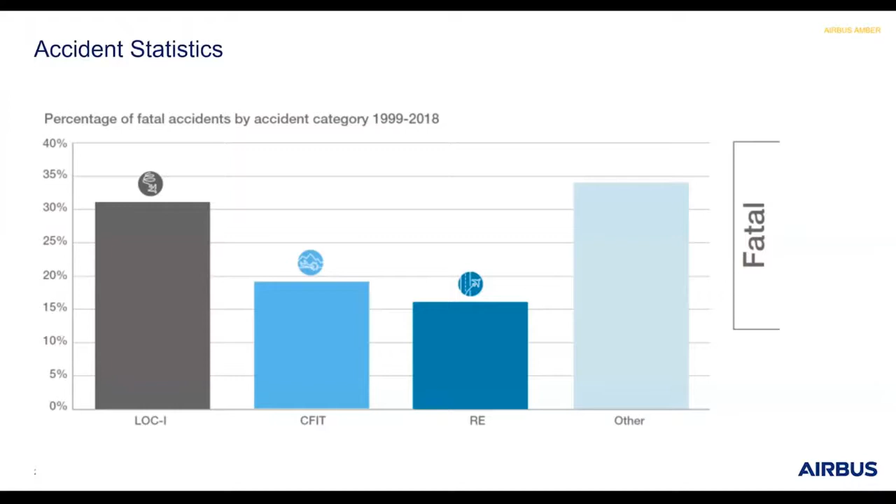Now, runway excursions are certainly not the largest proportion of accidents that create fatalities, but they are consistently about one third of the accidents that cause hull losses. So they generate a lot of financial damage, but whenever you have a runway excursion, it is also down to pretty much luck whether or not you will have fatalities and injuries.

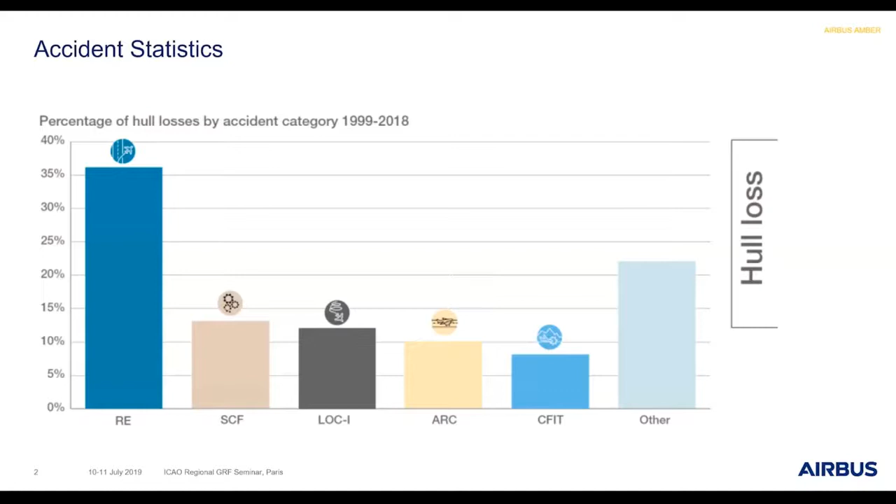So it is obviously a big industry drive to reduce this type of accident. And we have not been, over the last 10 years, extremely successful in doing so. The runway excursions are the one type of accident that tend to resist our efforts so far, even if we do see in recent times a decline.

It is at this point too early to say whether this is already due to the initiatives that have been launched by industry in order to address the causal factors. And when you look at those causal factors, they tend to include always some type of degraded runway condition. And this is what the global reporting format is trying to address.

It's trying to improve the way that we look at the runway in order to report it to pilots, and for the pilots to be able to assess the effect on performance more accurately.

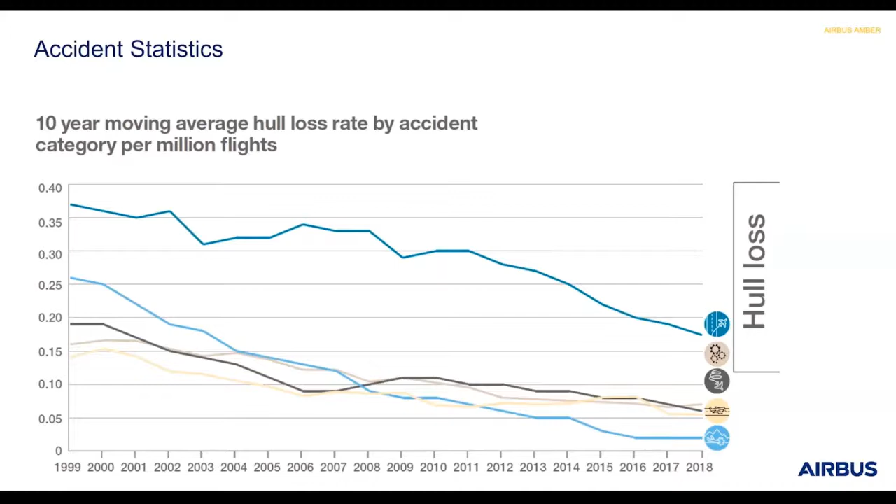So talking about the effect of the runway condition on aircraft performance, we have different factors on the runway that affect the way that the aircraft will, mostly in our context here, be able to brake. So we have inbuilt criteria like the macro texture, the microtexture.

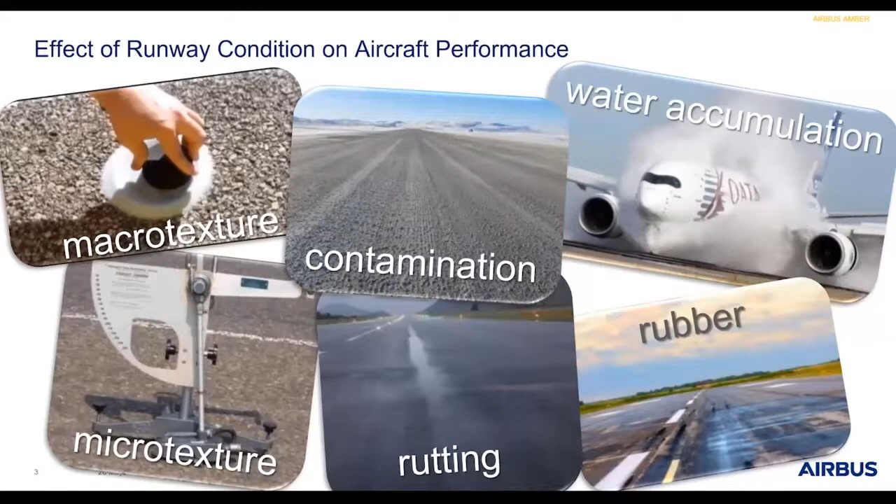We can have some sort of contamination that falls onto this runway due to the weather, like winter contamination, ice and snow, but also water, which is a huge concern when we're looking at runway excursions. We also have to consider the degradation of the runway over time, be it due to the alteration of its surface or due to the accumulation of rubber or other polishing effects.

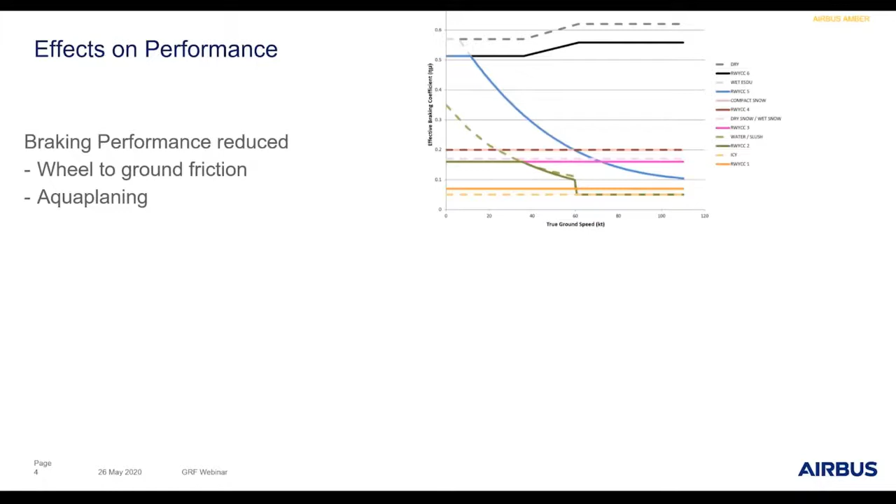So none of this is exactly new, and in performance, we have tried to model these effects by looking at two major contributors to the braking action that an aircraft can achieve on a given surface, which is the friction, and that includes aquaplaning effects where the tire is separated from the runway surface.

And the contaminants, the drag effects that the contaminants, and that includes a layer of water, may cause on the aircraft, which is mostly critical when we want to accelerate on the surface. So this also has an impact on takeoff.

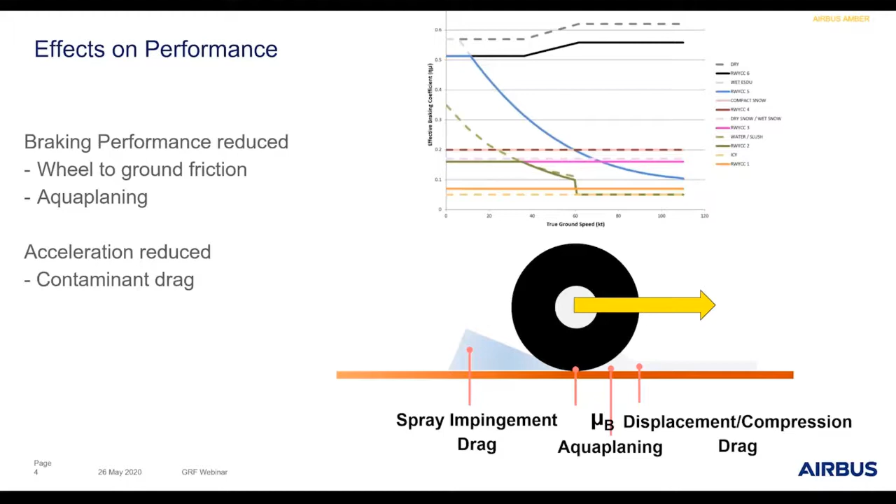So in order to achieve performance relevant reporting, which was the task of the ICAO Friction Task Force, we have to provide information to the flight crew that is important to their assessment and to their understanding of the runway state. And the operational need is to know what is on the runway.

Is it covering a portion that will have a significant effect on the performance capabilities of the aircraft? How deep is it when it's a fluid contaminant? This will have an effect on the aquaplaning and on the drag effects.

And something that the industry has perhaps not been looking at enough in terms of reporting is, are the built-in qualities of the surface still okay, or are they starting to become deficient in such a way that it will affect the capability of the aircraft versus the expectations that we put into our models?

So to fulfill this operational need, a new assessment and reporting method, the GRF, was put together, and it includes only the essential information for the awareness of the situation and for the capability of assessing the performance of the aircraft. This information is updated according to the relevant criteria, which will induce changes on this performance.

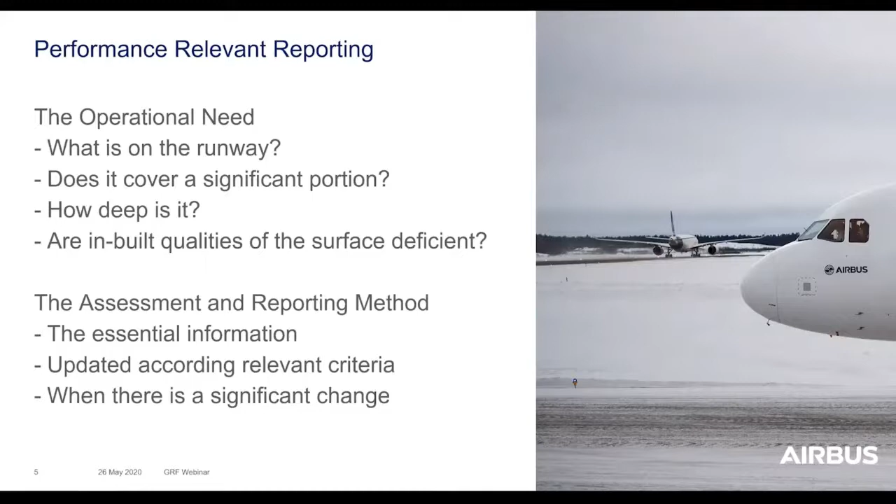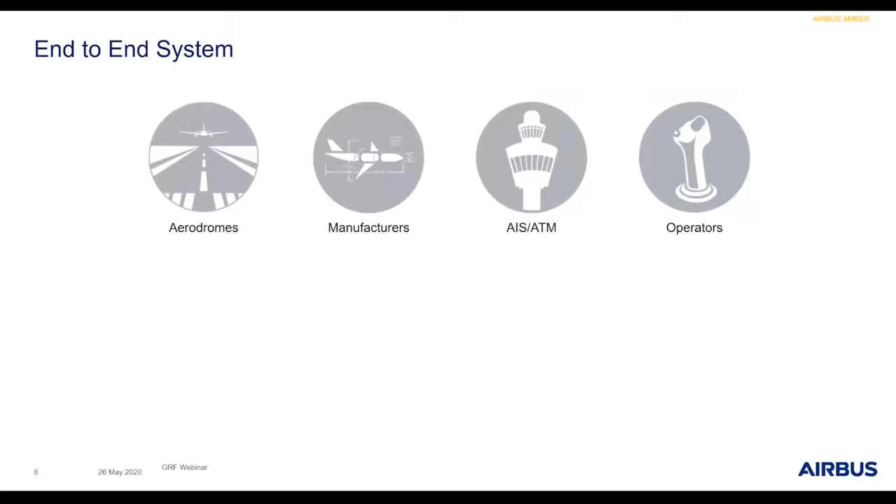And as you understand from this, this is an end-to-end system which involves all of the stakeholders of aviation. Obviously, the aerodromes who need to look at their runway and report the conditions, the manufacturers who need to provide performance. The information is relayed by the ATM, and the operators who need to use it appropriately.

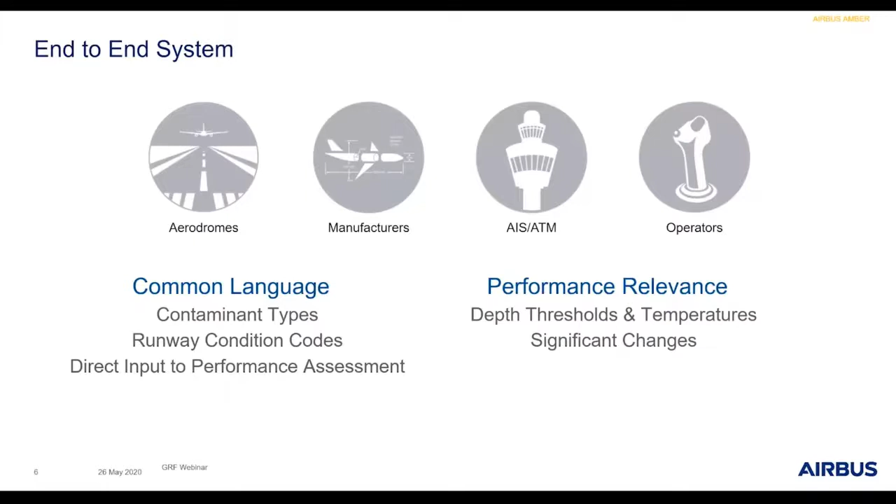And this end-to-end system has been achieved by defining a common language regarding the contaminant types that can be reported and used throughout the system, by defining a new concept, which is the runway condition code, which we will see a little bit later in this presentation, but which is a direct input into the performance assessment that can be made by the flight crew. And as I said, performance relevance was throughout this effort always the main consideration for putting information in and for identifying what is significant in terms of criteria and in terms of changes.

Now, it is an industry consensus that was put together by all of the stakeholders that have contributed and continue to contribute to the implementations that are being run by the various states and regions.

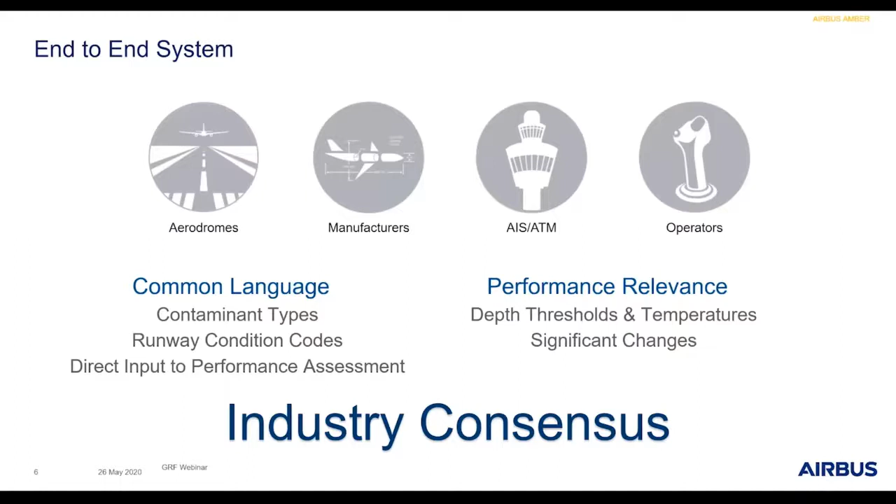And to support this effort, ICAO has produced a large number of documentation, which includes annexes and PANS and documents which are guidance. So we see that obviously the main document for aerodromes will be the Annex 14, supported by the PANS-Aerodromes, which will provide the procedures, already it does, and the Circular 355, which gives background information and guidance to aerodromes.

On the aircraft manufacturer's side, we have a small change to the Annex 8, and we will soon see the aeroplane performance manual, which will be published in its unedited form soon.

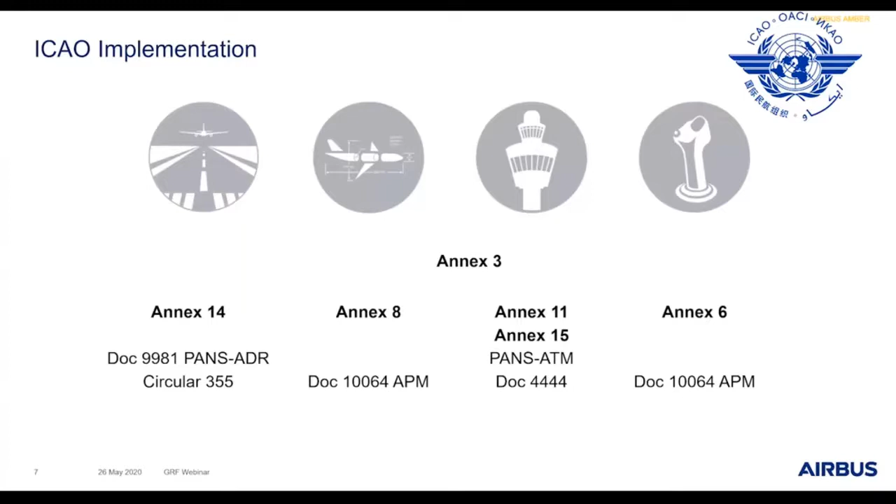Then we have on the ATM side, Annex 11 and 15, which are supported by the PANS-ATM and the Doc 4444 for the phraseology and the format of the new SNOTAM format. And on the operator side, Annex 6, which is also supported by the same aeroplane performance manual.

The tasks that fall onto the different stakeholders are the way that aerodromes are going to assess and report surface conditions, the way that aircraft manufacturers are going to provide performance information, and the way that the information is relayed by SNOTAMs and via ATIS to the flight crew.

And it includes for the flight crew a new requirement to perform performance assessment at time of landing, and also to report into the system whenever worse than previously reported runway conditions are observed by the crew, so to provide a special air report.

The keystone of this whole effort is the runway condition assessment matrix. And we're going to go into the various elements of this immediately. It is the method by which we can assess how much the aircraft is affected by whatever is on the runway.

And what you see here is the complete version, which has been built predominantly for winter conditions. But this system is equally applicable around the world in all those countries that are affected by rain, and I don't think that anybody is exempt from that.

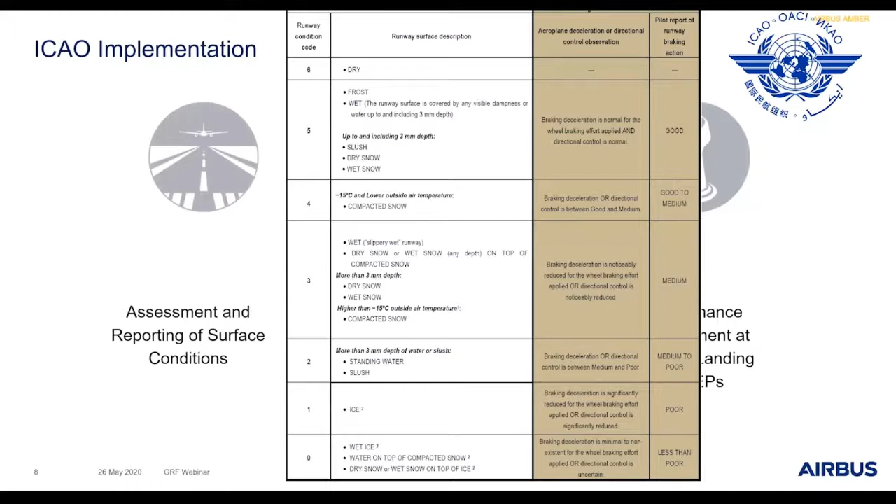So we also have a simplified version of this matrix, which addresses the changes of runway conditions due to the presence of water. And it allows a simplified assessment by the concerned aerodromes that do not see winter conditions in their region.

It is no less important, though, to report these variations in wet conditions, because you can see already from this matrix that a little bit more water on the runway can lead to a stark degradation of the conditions for the aircraft.

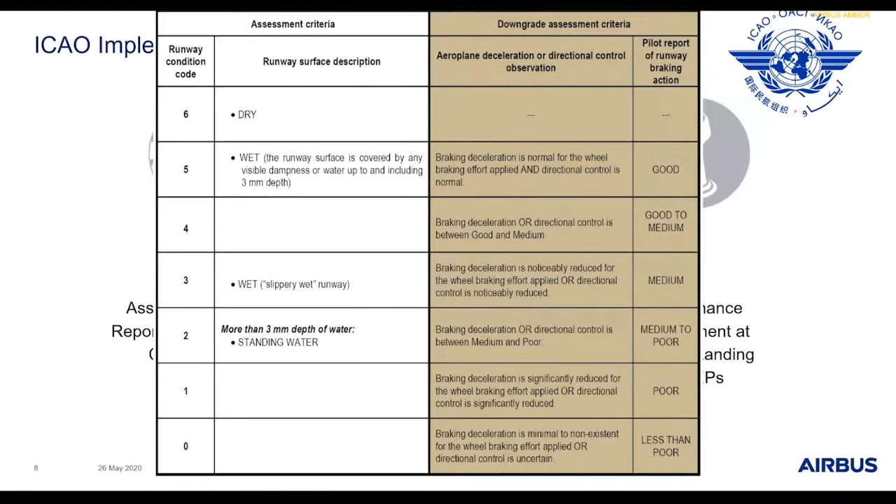Let's have a look at the elements of this matrix. I was talking already about the runway condition code. The runway condition code is the single most important information for the flight crew when assessing landing performance.

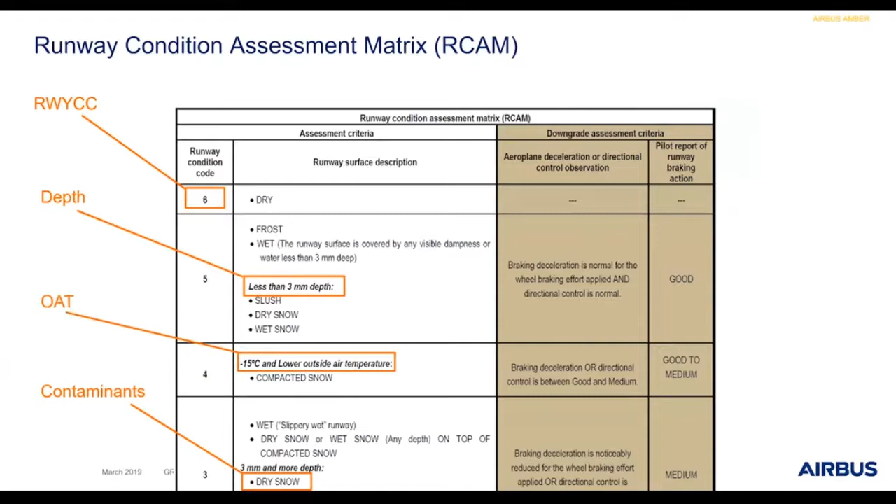It is the result of an overall assessment of the runway, looking at all the other criteria, like the contaminant type, the depth of the contaminant, the outside air temperature for some of the contaminants, other observations such as vehicle braking used by the ground crew, AIREPs provided by preceding flight crew, and coverage, which is not directly in the runway condition assessment matrix, but which is part of the assessment process.

You may have noticed that this matrix no longer includes measured friction as a criterion for reporting to aircraft, because all of these things that you see on the screen are relevant to aircraft performance. Measured friction is not directly relevant to it. It does not represent a metric that will be useful in assessing how the aircraft will perceive the runway condition.

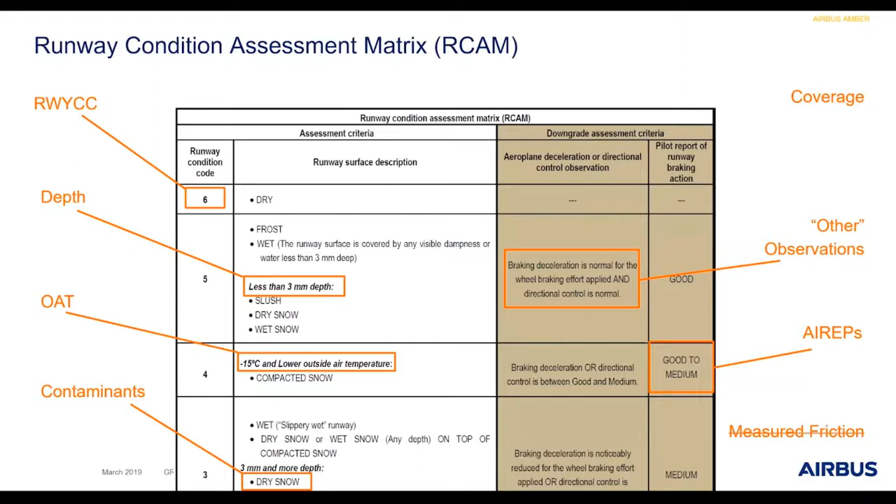So the predominant thing to know about the RCAM is that all the reporting criteria and all the significant changes that come in the procedures associated with this RCAM have been set for relevance to aircraft performance.

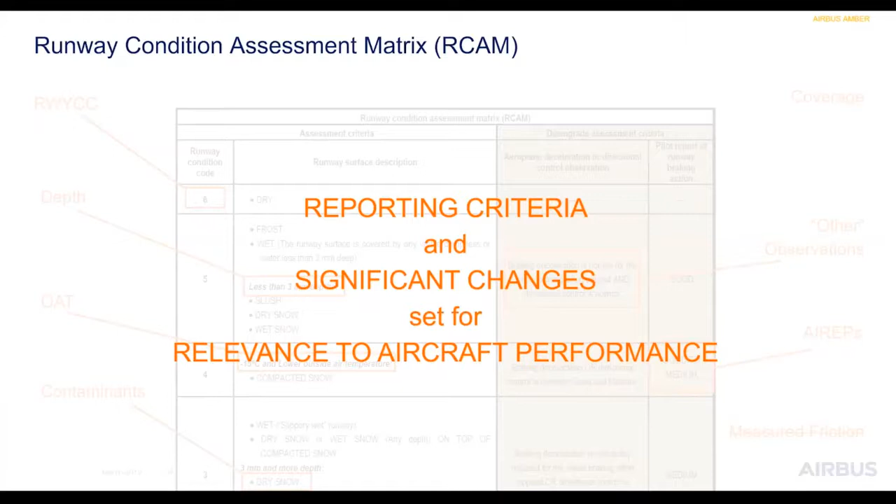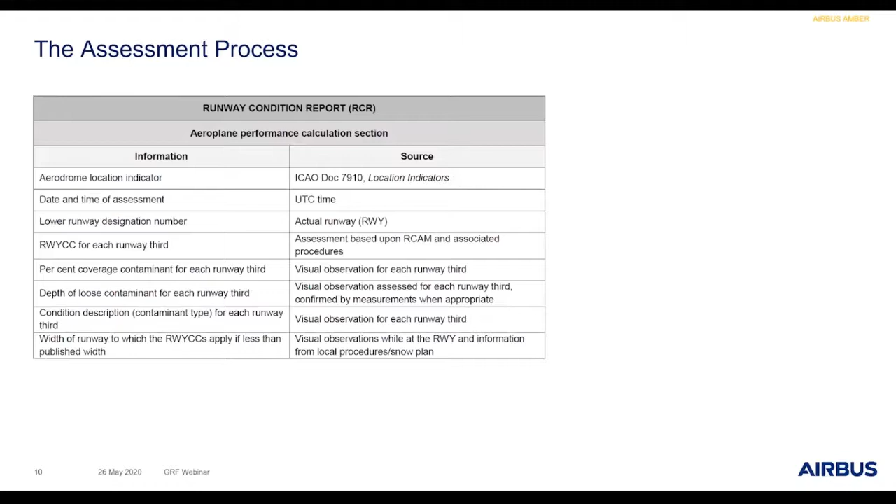The assessment process itself consists in putting together the information that is contained in the RCR, or the Runway Condition Report. Again, only information that is directly relevant has been included, and you see a list of it here. You also see how this information should be sourced, and you will find again and again in this table the visual observation. It is the central tool to the assessment of runway conditions for the GRF.

So measurements may be useful, but are not required. This is a system that is accessible to anybody, whether they're equipped with sophisticated measurement equipment or not.

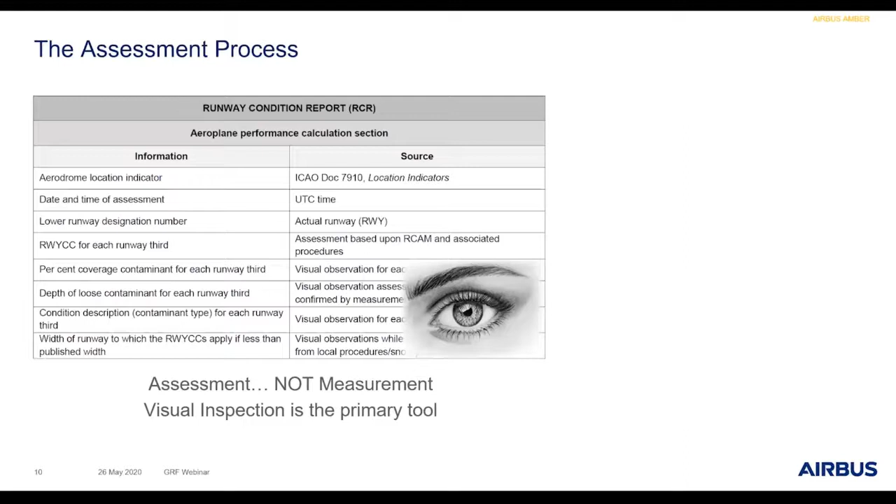To help the aerodrome operators, we have provided in the procedural material some flowcharts that also give you a process on how to assess your runway condition on a day-to-day basis. You can find this in the PANS aerodromes, and you can find additional methods and information in the Circular 355.

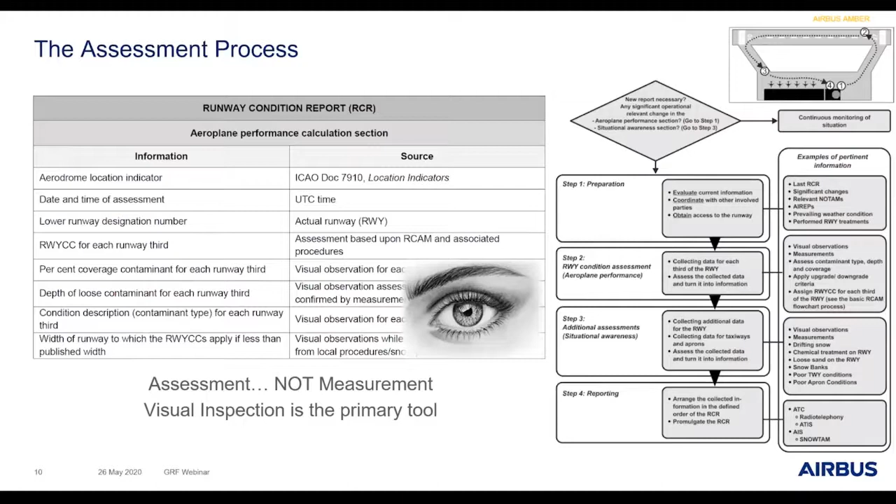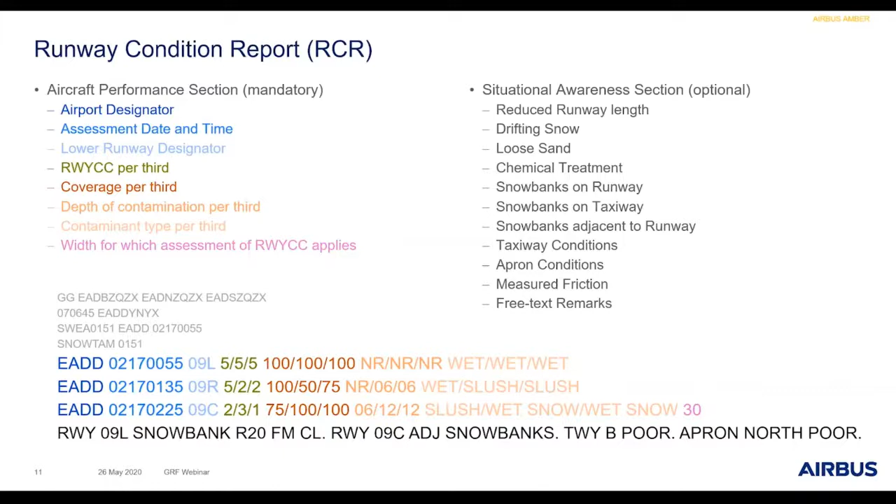One important constituent of the overall GRF system is a new set of landing distances provided by manufacturers. And these landing distances are more accurate than what we have been doing before. To start with, landing distances never used to include the outside temperature and the slope of the runway as a criterion for their determination, which is frankly surprising considering the magnitude of the impact they can have.

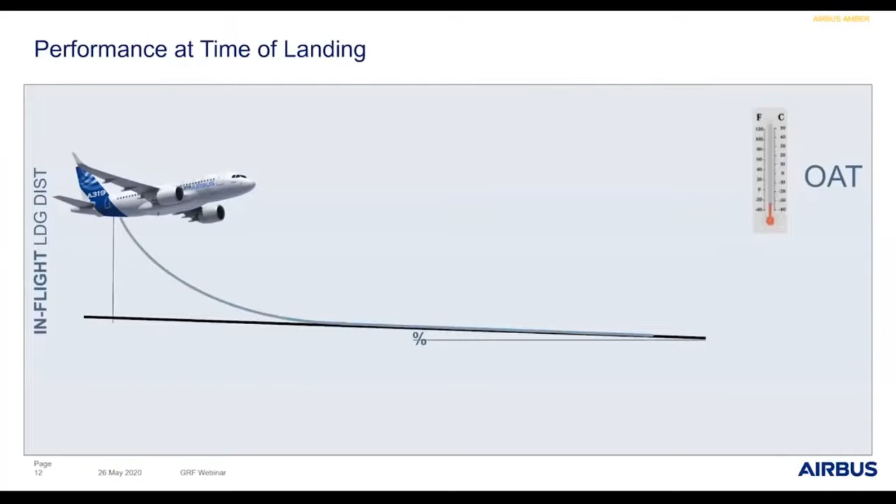It is also calculated for an operational approach speed and takes into account an operational flare distance. It takes into account the use of automation like autoland and auto-brake. We are allowed to use the benefit of reverse thrust, and this is important to understand for flight crew.

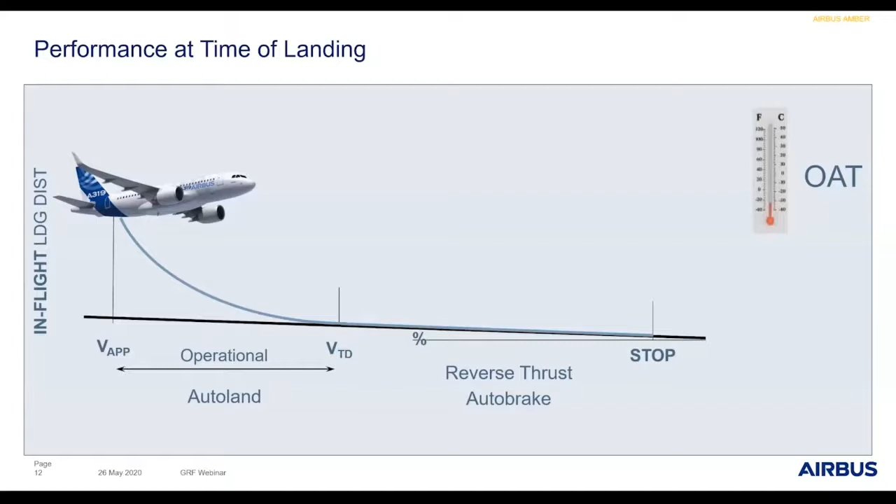It is available primarily for the runway condition codes 1 through 6 that we have seen in the RCAM. It should probably not include any benefit of drag, because this is always beneficial whenever you are braking in aircraft. And it should include a margin of at least 15%, except in cases of emergency.

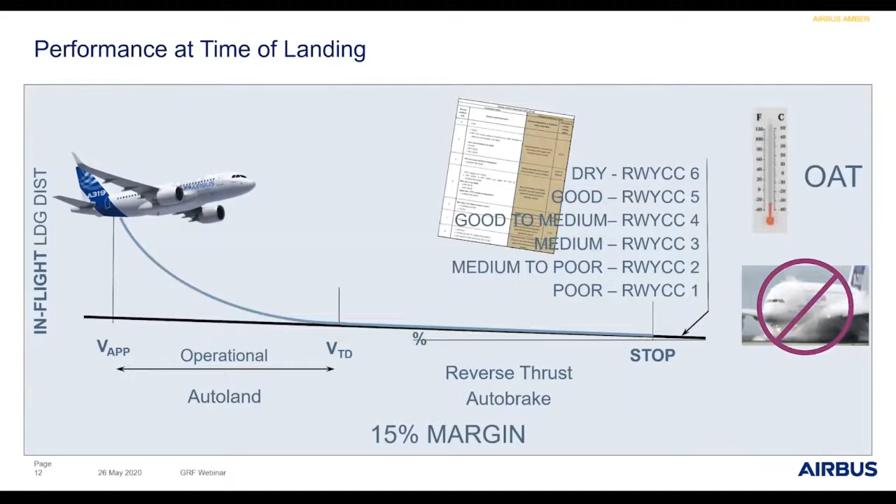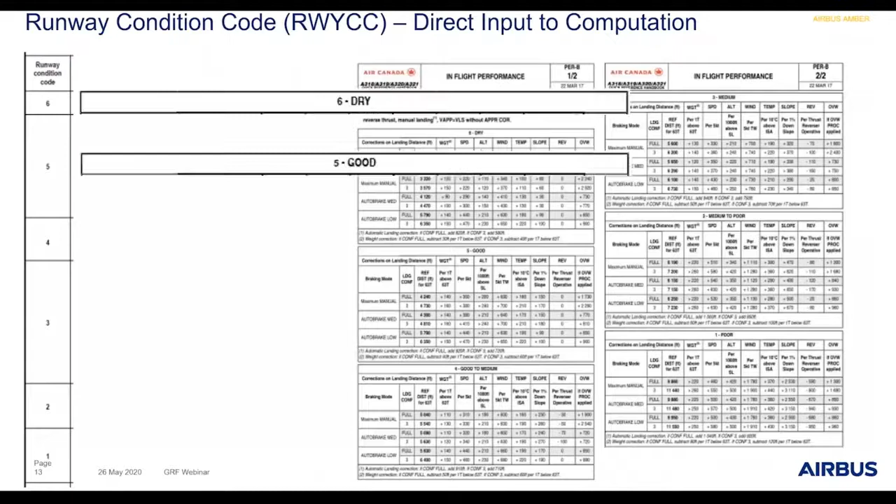So for us manufacturers, we now provide a new set of tables that are only shown for these various runway condition codes and their associated braking action terms: good, medium, poor, and intermediates. So we have one table for each of these conditions, but obviously it is also the same criteria whenever using an electronic flight bag.

Obviously, the GRF was designed to provide benefits for aircraft operators. It is a harmonized global standard, which will mean that pilots will hear the same type of information wherever they operate in the world, and it will mean the same. It is easier to understand than the current SNOWTAM, which comes with a lot of codes, and probably most pilots need some sort of help in order to decode it.

While the new SNOWTAM can be directly read, and everything is available directly as the final text, like the contaminant types. There is a direct relation to operational procedures and performance, as I have pointed out several times now. And we've also improved the relevance and the timeliness of the reporting. It overall creates a better situational awareness for pilots, and a big attention was put onto having the same information, synchronous information, through all the different channels, be it the SNOWTAM, the ATIS, or the ATC.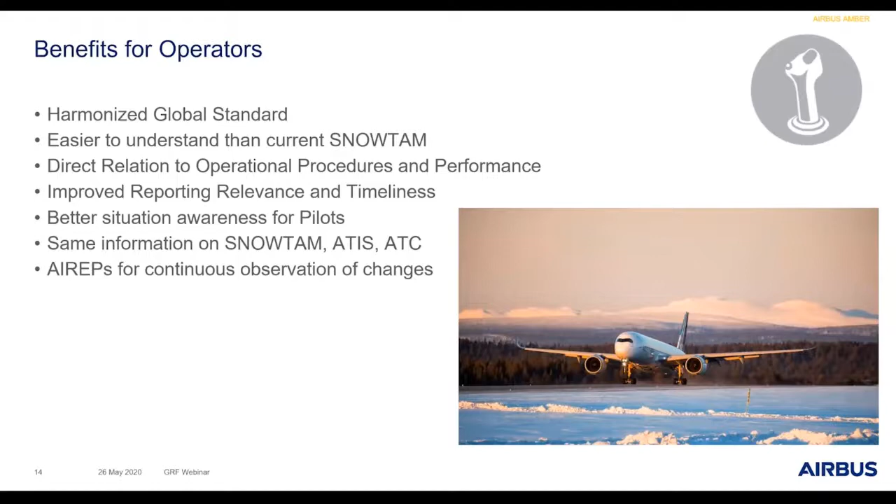Pilots are able to influence the overall system by providing reports whenever necessary, and to provide continuous observation whenever changes may occur. But every new system comes also with challenges.

The new level of performance relevance that we have achieved has also increased the expectations for improving the decision-making process, whatever the runway conditions. The fact that we're giving information by third of runway can create a new challenge for pilots to assess the performance accurately.

Also, it is currently felt that the ATIS reports may become quite lengthy on multi-runway airports, so there's still an ongoing effort in order to reduce the amount of information that is transmitted by ATIS.

We also have to get this runway condition report into the cockpit while the aircraft is in flight in order to get the latest information to the flight crew. This is the purpose of the whole GRF, and it is important that the technical means are put into place for the pilots to fully benefit of the new system.

The system was primarily designed to address the issues on landing because that's where we had the largest proportion of accidents, but it is obviously also useful for takeoff. For takeoff, we have been perhaps a little bit slow in making the adaptations for the pilot to fully take the benefit of the new information provided in order to make the best possible assessment for takeoff. Even though it has to be said that during takeoff, the exposure to runway excursions is much reduced.

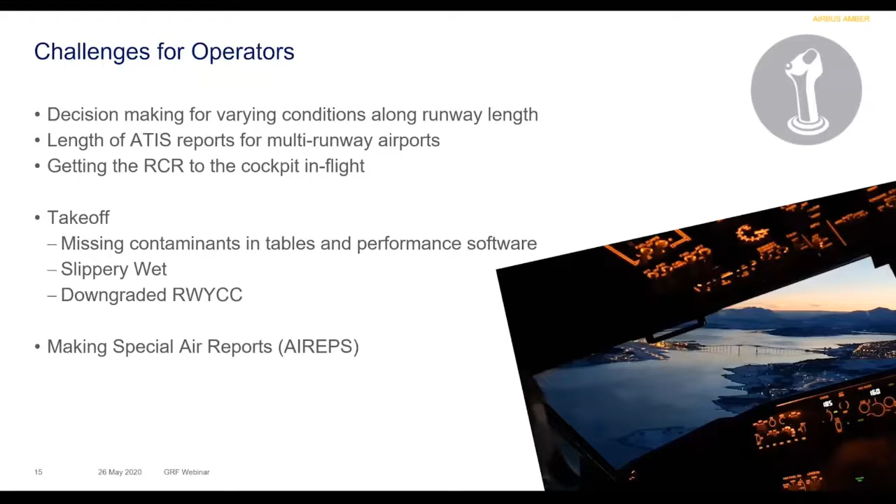Many pilots around the world are also not trained today in making special air reports. And that takes us to the next section, which is these procedures need to be trained, and procedures need to be put into place by the airlines to make best use of the system.

When we're talking about the approach preparation, it is important to give the pilot the means to have canned decisions, as they're called. That means that all the calculations, all of the assessments are made way before the final approach in order to assess what the maximum crosswind, for example, or the minimum runway condition code that are acceptable for a given operation are, so that quick decisions can be taken by the flight crew.

Pilots need to be trained to understand the assumptions in their computation, to know what they're covered for and what not. They need to understand the RCAM, the RCR, the various formats. They need to have a grasp of the reporting process. They need to understand that upgrading and downgrading exists. They have to be aware of how a runway can change under given conditions, and particular attention should be paid to the wet condition and the conditions of high water precipitation, so heavy rain.

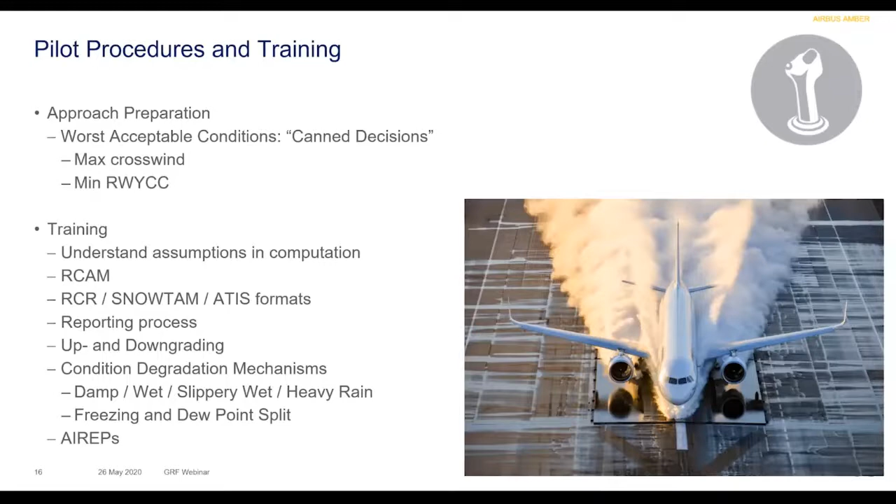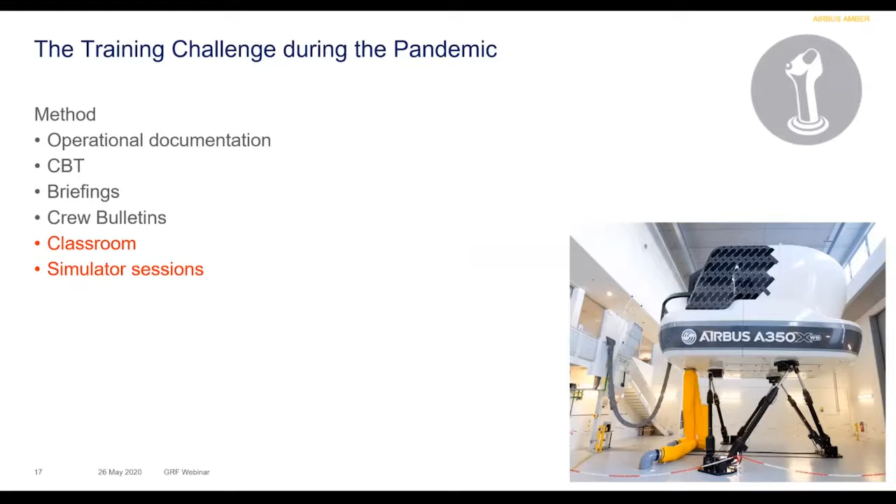Training is obviously now a challenge during the pandemic because we would have liked training to include also classroom and simulator sessions in order to really get the attention of the flight crew. These are now very difficult to organize.

ICAO is currently considering a delay of the applicability date. It was given as the 5th of November of this year, but it may change. Some states have already announced delays. This is not an excuse for losing momentum.

Even though it is difficult currently to reach all the stakeholders, it's important to keep up the effort, to use the efforts that have already been put into place. We have seen that half of the states consider that they will be ready by the end of this year, and they should use this in order to use the next winter as a test opportunity.

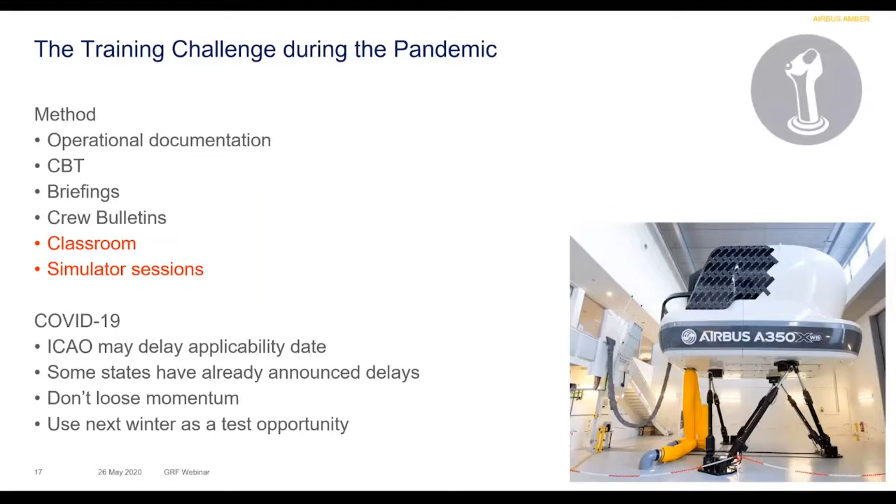Also, just to mention, there is an ICAO encouraged training that has been put together by IATA. It's a CBT, so it's a 3-hour training, which can produce a certificate that is available for all the actors within the airlines.

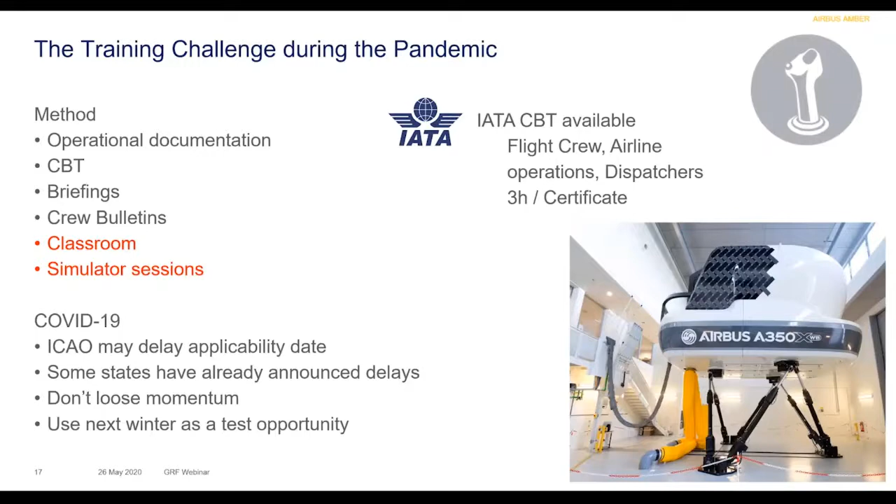So as I said, this is an initiative that was put into place for the operators to allow safer operations. It is a new format, very easy to learn, which is a direct input into the performance assessment at time of landing and working through the outcome. And it is very important to remember that this is global. So that concludes my presentation, and it's my pleasure to hand on now to Arman.

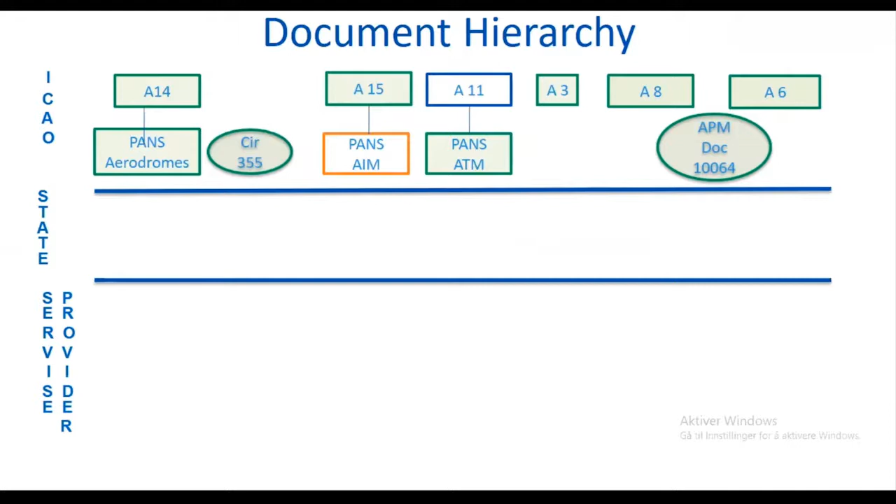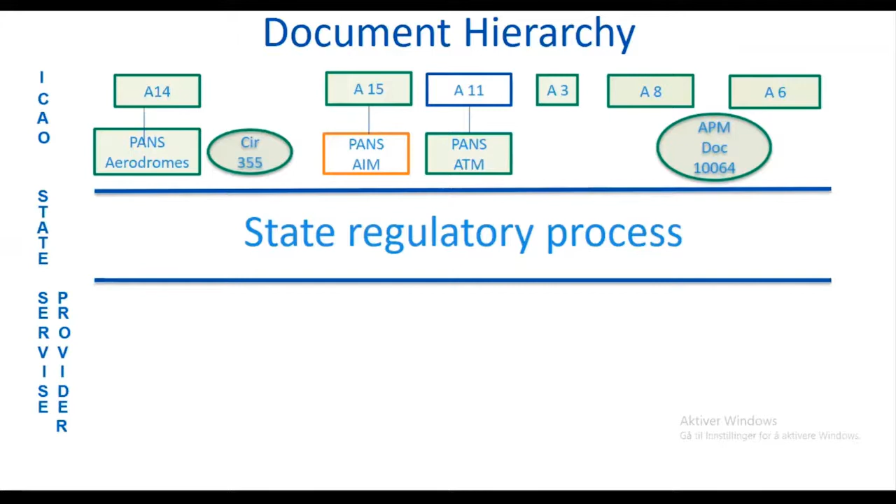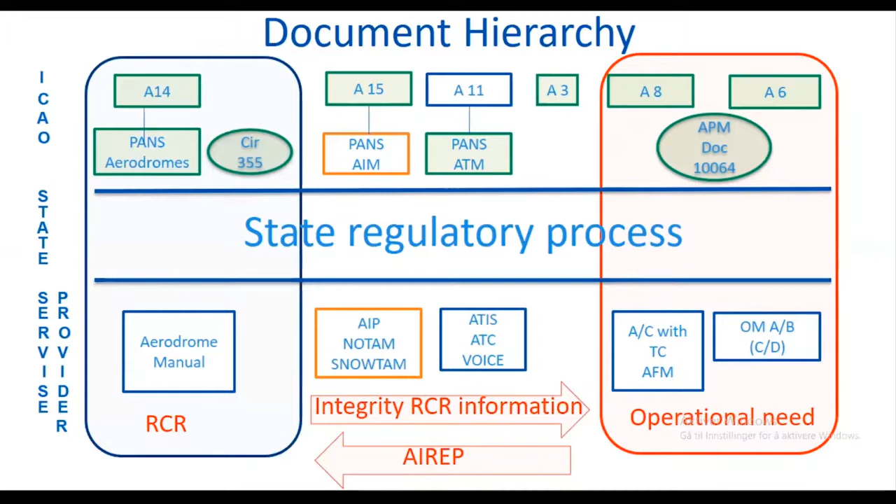And if we don't meet operational need, the pilot's going to make a remark, send an AIREP back to the aerodrome, to the runway condition report. It's part of the system. But for this to be a closed loop, we need to send information to the end user. So with this, we get a kind of an overview of the operational need, the runway condition report, why we report it, and how it's been communicated.

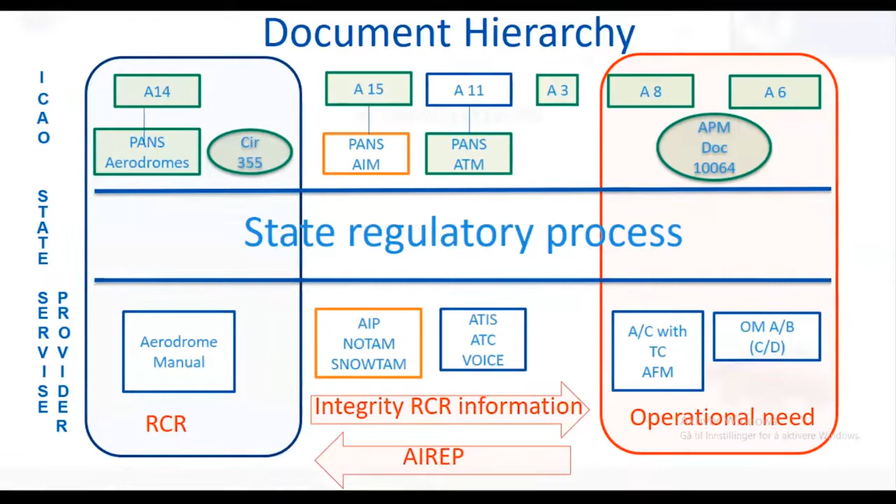For most of the world, wet is the condition that they experience. Not all parts of the world focus on the snow, slush, and ice. So in the rest of my presentation, I will leave out the snow, slush, and ice and focus on the wet and see what that means for the runway condition report. The principles are the same, but for the wet conditions, we don't have what Lars called the upgrade, so we don't need to worry about that part of the procedure.

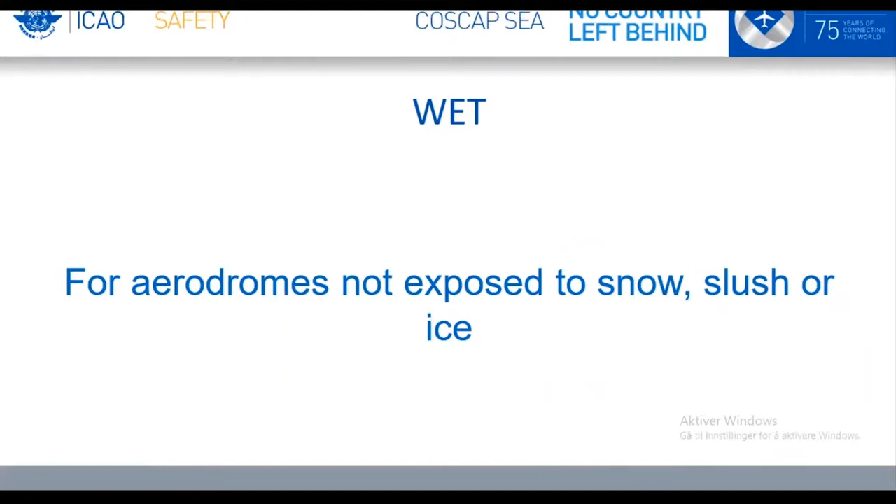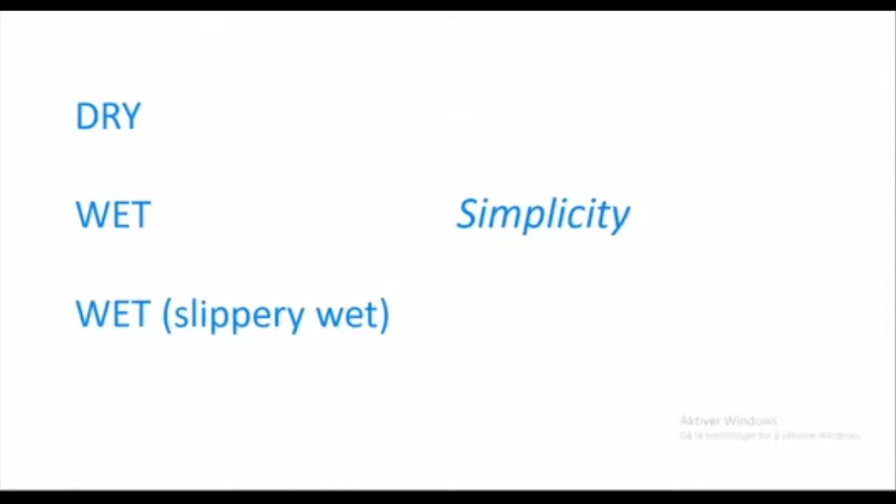And it's all quite simple, really. What the aerodrome needs to identify is the dry condition — that's simple enough. And then the wet condition — that's also simple enough. Then comes the wet, slippery wet — now we come into a little more complicated situation. And at the end, we have the standing water. These are really the four things that the aerodrome has to report, the conditions.

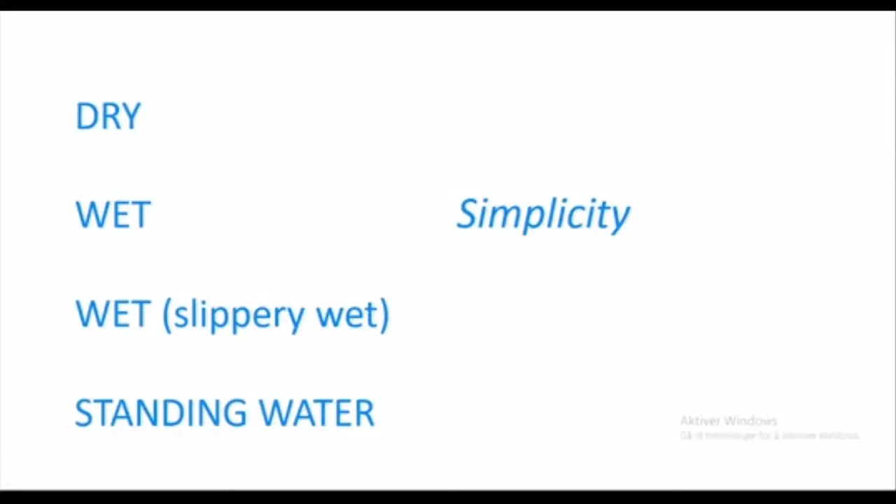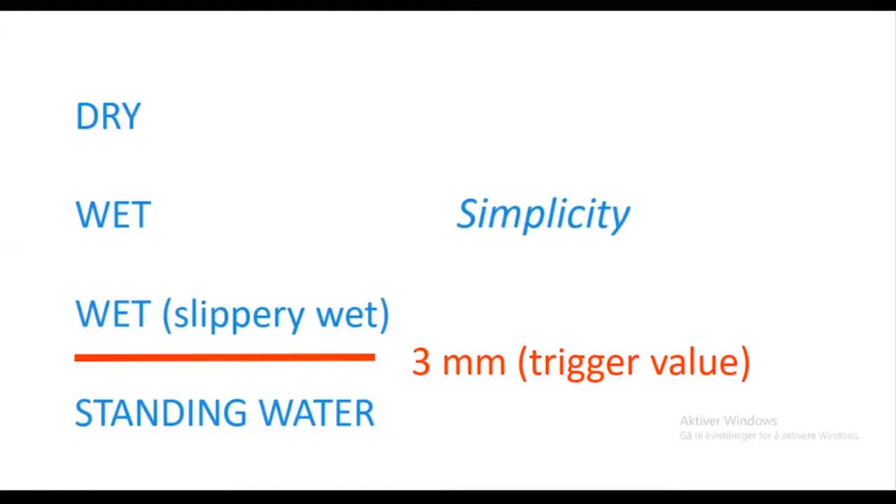Then comes this with the 3 millimeter trigger value. Above 3 millimeter, we have the standing water. And it's a trigger value because it also triggers how to report. So with up to and including 3 millimeter, the wet runway condition report is using the ATM, ATS, and ATIS service only. Above that, we also make use of the NOTAM and SNOWTAM system in addition to the ATIS.

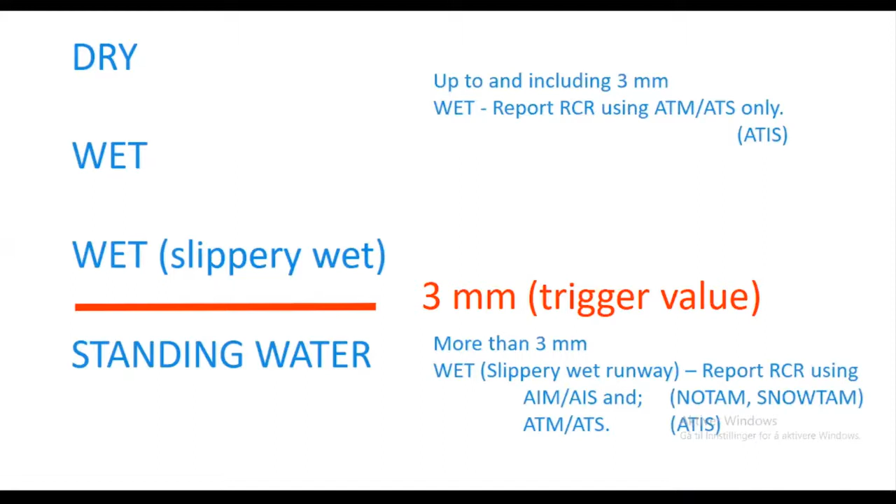So another thing with this 3 millimeter is that it addresses a maintenance issue. Unless you are in an area of the world where the heavy downpour oversaturates the runway and you get standing water for that reason, otherwise this situation relates to a maintenance issue. And if you have a maintenance issue, you should also publish a NOTAM.

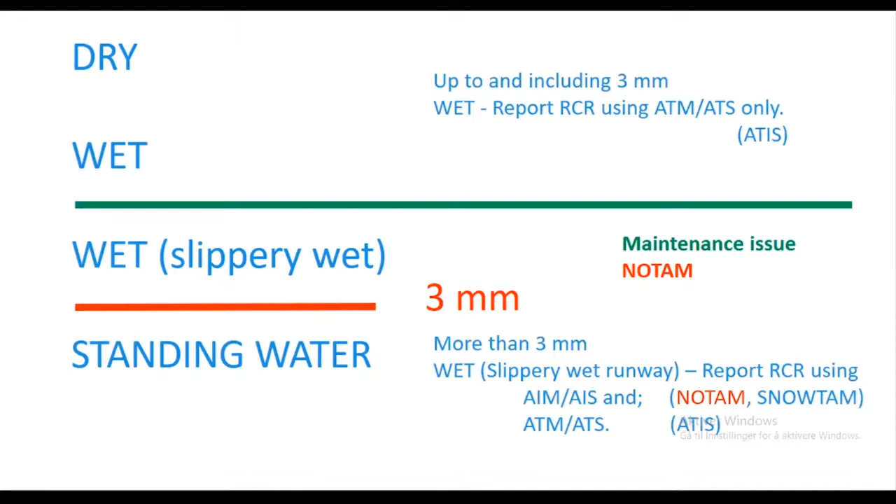Through the NOTAM for the maintenance, you also get information for this 3 millimeter. We also talk about the coverage, giving a description of how many percent of the runway is covered, for each runway third. But the main focus is on the path of the wheels along the runway.

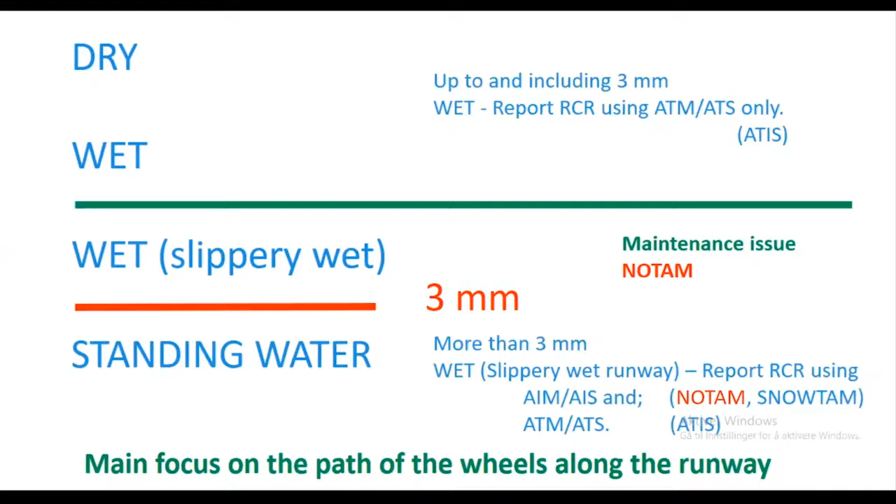So again, the 3 millimeter depth is assessed. You assess it. Measurements are related to the maintenance issue. During your maintenance you will get the measurements, and then you know when you do the assessment.

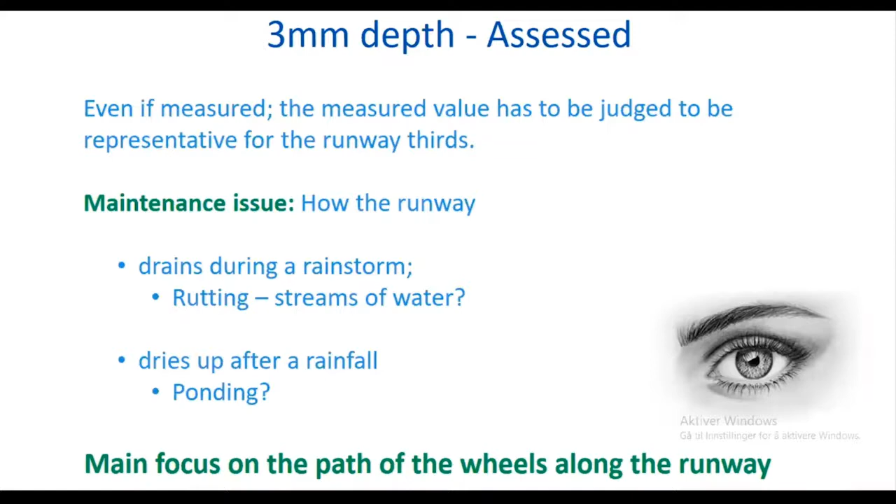So again, using your eye, you know how your runway drains during a rainstorm. Do you have any rutting, streams of water along the ruts, or any ponding as it dries up? If you have, you're into a maintenance issue. Again, the main focus is on the path of the wheels along the runway.

So, a maintenance issue, and here we come in with measurements. Rutting, if you have that - the simplest instrument is an ordinary straight edge and a ruler. That straight edge could be a line stretched between points, and you measure from that line. You need 3 persons and a ruler. Same with the ponding.

Then there's the state of the microtexture - this is a slippery wet condition. That's an indication that the runway doesn't have the sharpness it should have. An old method was testing by touch.

There are lots of other tools that can be used. But for the runway condition report, you use an assessment. For the maintenance issue, it's kind of a business model you have, what kinds of tools you want to use. It's the management of the runway surface characteristics which is really the issue here - it's trend monitoring, and you publish with the NOTAM rutting, ponding, and slippery wet conditions.

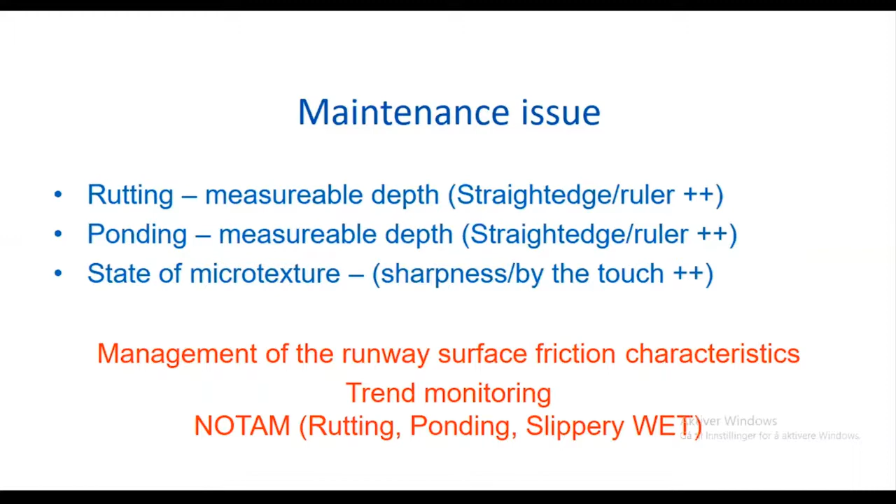But this is really not the reporting issue - this is the maintenance issue, and it's what you need to do proper runway condition reporting. The trend monitoring concept, you will find that in another ICAO document.

And that's really how you maintain your runway. You monitor the different characteristics, and you see how they degrade, and you intervene to bring it up to a certain level, making sure it never goes below a minimum friction level, which has to be set by the state.

The reason this is set by the state is that with the traditional tools used, there can be no global standard tied to the runway friction measurement devices as such. So there are no global values to be used for these, and the method and methodology to be used has to be set by the state. It's not only related to the friction measurement devices.

That can also be investigation into aircraft data. It can be complaints, air reports coming from pilots. In short, it's all kinds of information that can be tied to pavement management.

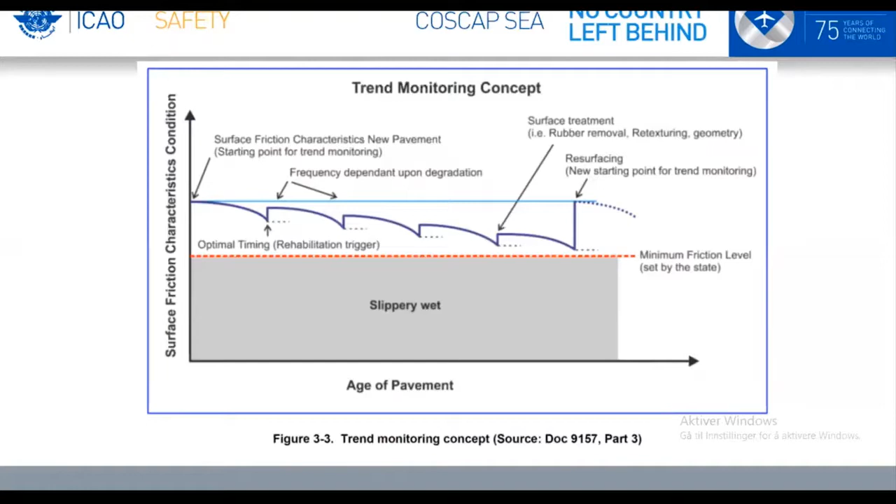So then, if we look into what is the runway condition report for a wet runway - this is the information string that goes in: XXX indicates the airdrome, then we have the date and time group, then the lowest runway designation number, and 555 which is the runway condition code. Then we have the percentage coverage. The depth for a wet runway is not applicable - we don't report it. And then it's wet, wet, wet.

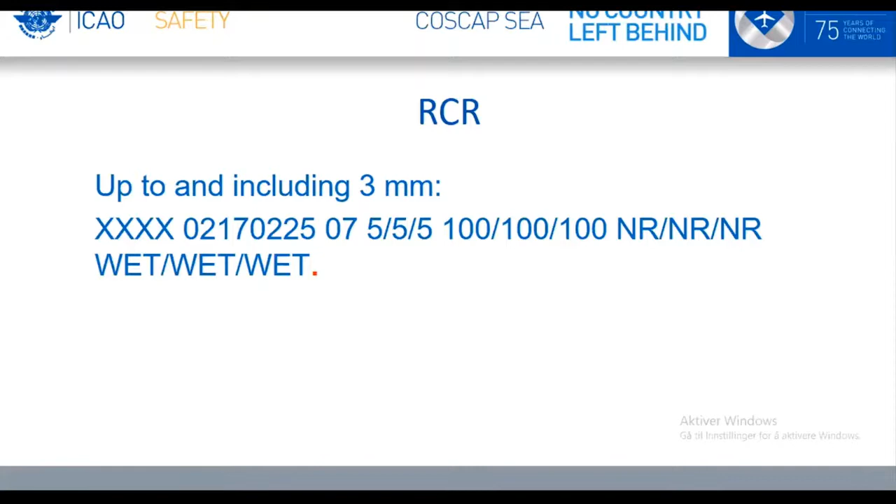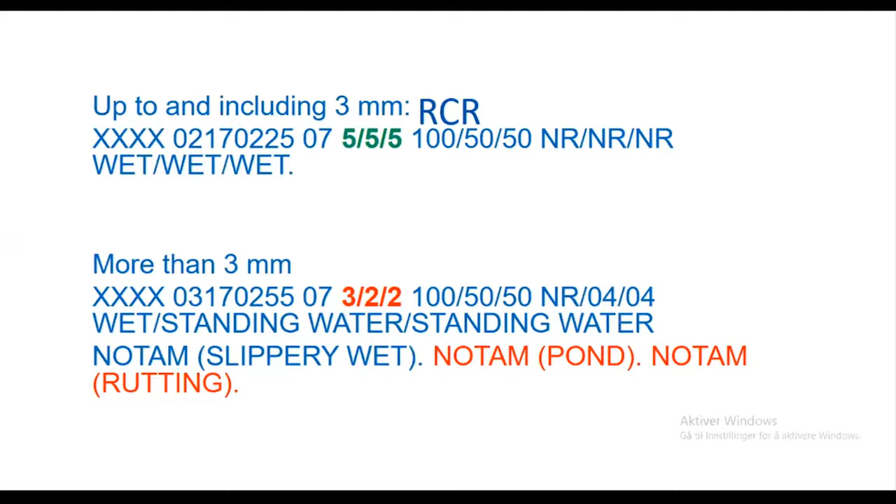If we look into the situation with more than 3 millimeter, what really changes is the runway condition code. The aircraft operator now needs to take into account a much degraded runway. He should also have had additional information in the NOTAM giving more detail into what this is, and this NOTAM is the base information for that. When producing this NOTAM, you also get the information you need to do the assessment - so you see this is kind of related.

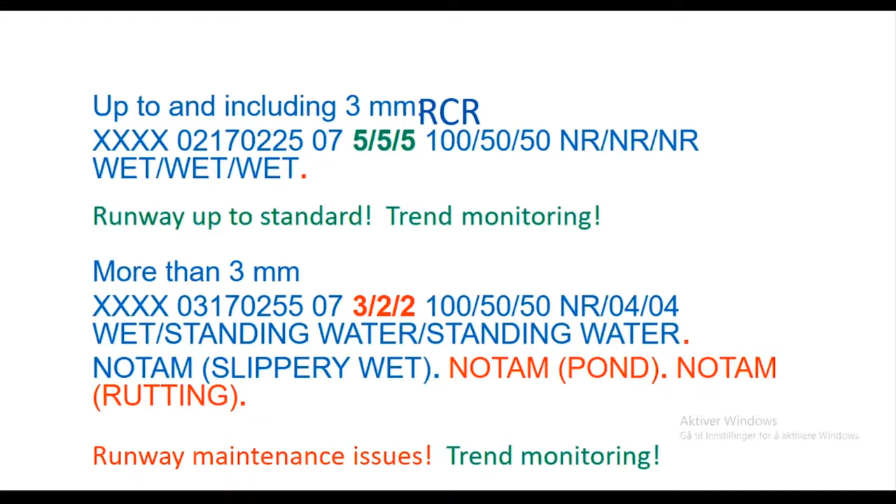So in the upper example, up to and including 3 millimeter, your runway seems to be up to standard - you have trend monitoring. In the lower one, you have a runway maintenance issue. The trend monitoring is always going on.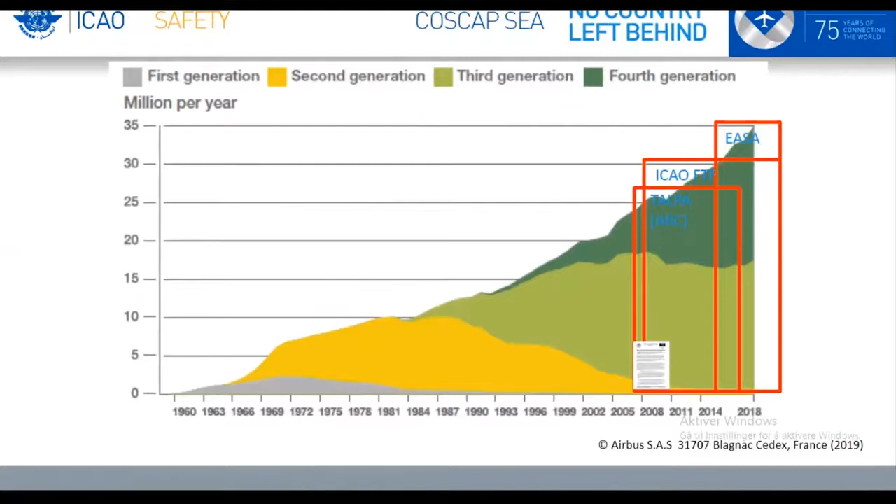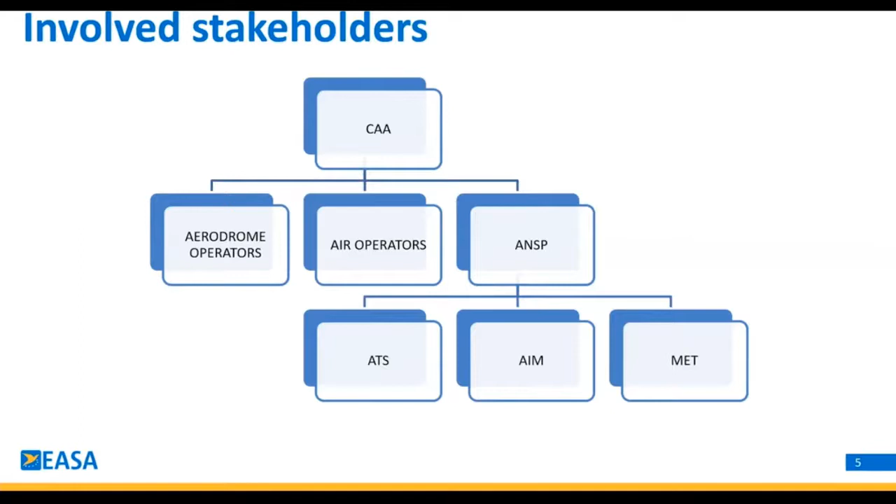The involved stakeholders. We believe that everything should start from the state, from the Civil Aviation Authority. And of course you need to include the three major players in this method: the aerodrome operators, the air operators, and the air navigation service providers. With the air navigation service providers, we refer mainly to air traffic services, to aeronautical information management, and MET providers. These are, in practice, the major players for the implementation of the GRF.

And well, it's nothing different from any other project, so you need to assign a project manager. So you need to have someone in the state who is responsible for the implementation of the GRF. Of course, this person cannot be alone, has to be supported by focal points.

And mainly, it's important to have focal points for each and every domain. So you need one focal point for aerodromes, another one for ATM, another one for air operations. In this way, you ensure that you have enough resources for the implementation of the plan.

It also depends on the size of the country and the activity. So for a small country, of course, the project team will be smaller, while for a big country you expect a lot of people to participate in the implementation team.

And then in the project plan, you need to assign the actions and the timelines. And when we are talking about actions, it's the education, the promotion, the training, the testing, and the publication in the AIP.

Starting with education, everything starts again by the implementation team. And you know, to start implementing something, you need to understand, first of all, the implementation team needs to understand what we are talking about. So it's very important that this team, the implementation team, reviews all the available documentation and prepares well the regulatory material and information package.

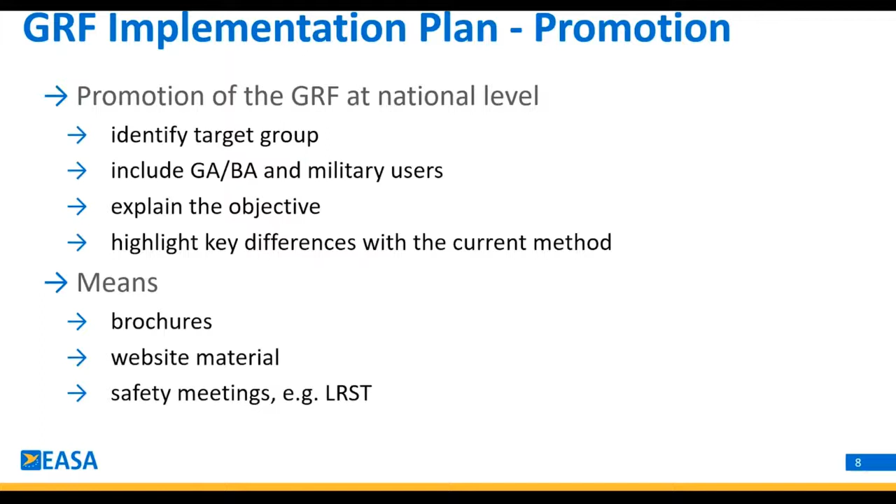And how can you do it? Well, we have the technology to do it with brochures, with a website, with safety meetings. It's a good opportunity, for example, when you have in the aerodromes the local runway safety teams, the CAA, or members of the implementation team, to go there and present the method. So you can use all these means.

The training. The training is also, I think, the most important thing, and I think also Annex 14 contains specific standards for training.

We need to identify who has to be trained. The most important is to train the aerodrome staff, the pilots, and ATS, AIS staff, but also the CAA, because they will be the ones overseeing the application of the method.

Customization of the training: not all states have the same climate conditions, so for aerodromes you adjust the training based on the climate conditions and the aerodrome. For flight crews, you need to consider where they are flying. For example, an air operator coming from Africa or Southeast Asia normally experiences wet conditions, so it's fine to train them for wet conditions there, but if they fly to Europe or the States where they encounter snow and ice, they need to be trained for these conditions too.

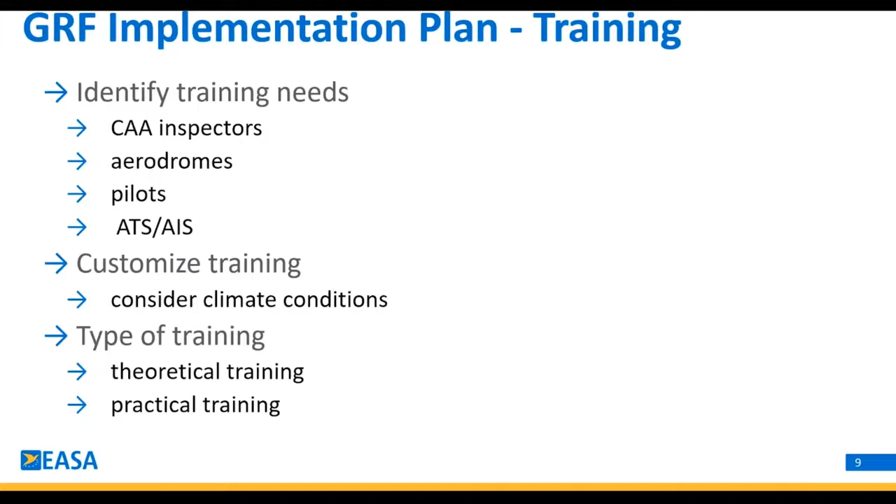The other thing is the appointment of instructors. It's a new method and not so many instructors are available, so if people are familiar and collecting experience, you may use them as trainers.

The state and the service providers need to develop a training plan. This plan needs to cover initial training, normally before the applicability date or for new employees, and recurrent training. Recurrent training should normally be done on a yearly basis, but this is a subject to be discussed between the service providers and the CAA. It's very important.

The AIP and the SNOTAM have been changed; there is a new format. So the staff needs to be trained to prepare the SNOTAM. This applies to aerodrome staff preparing the runway condition report, which is almost identical with the SNOTAM, and also the AIS staff. If you're using automated systems or software for generating SNOTAMs, that software needs to be updated, and the relevant information has to be included in the AIP as well.

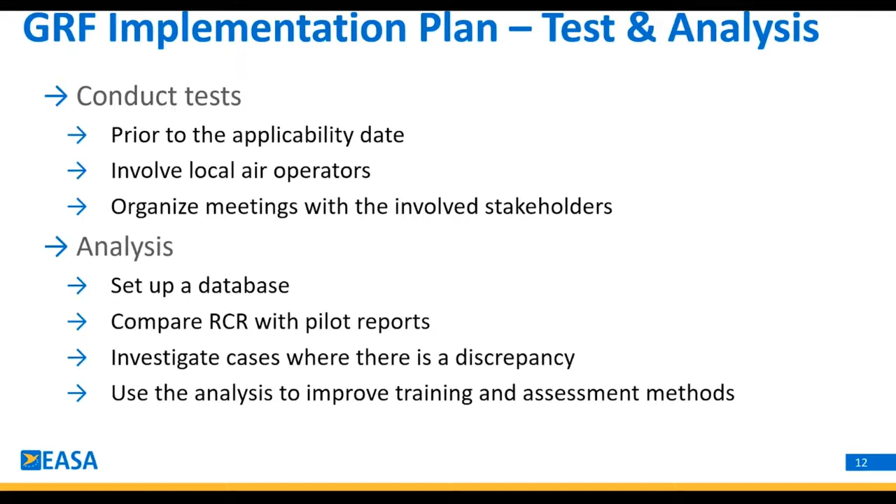And I think that concludes my presentation. Thank you very much.

Thank you very much, Vasileios. That was excellent. It's actually what you're doing with the European states is exactly what I'm working on as well with the COSCAP, and what the ICAO regional offices are working on in helping the states implement these new requirements on time and in an effective way.